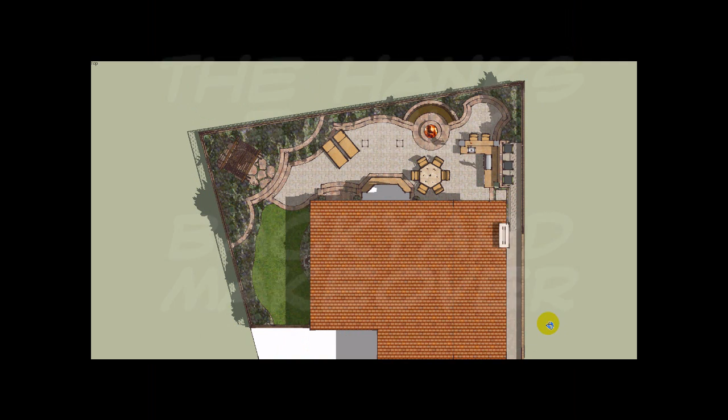In this version, we are standing over the house looking down. I have opted to design a barbecue with a fire pit as opposed to a fireplace. I felt the fireplace was possibly a little too bulky, and with it in that area, it made it tougher to get a barbecue kind of outdoor kitchen feel going without crowding the area. So I opted against that in this first design, but we could always explore that later.

In this version, you'll see we have the existing wood structure over here. We have some new planter walls that will take care of that raised area and also set some of these other lines in motion that I've opted to go with. We have a new buffet counter in this area, some new steps down from a future French door coming off the dining room, and a nice bar with a trash area behind it hidden by a raised wall. We have some seating walls all along the back here.

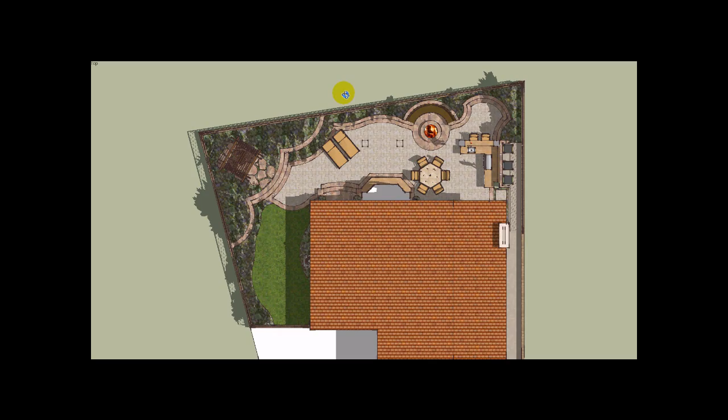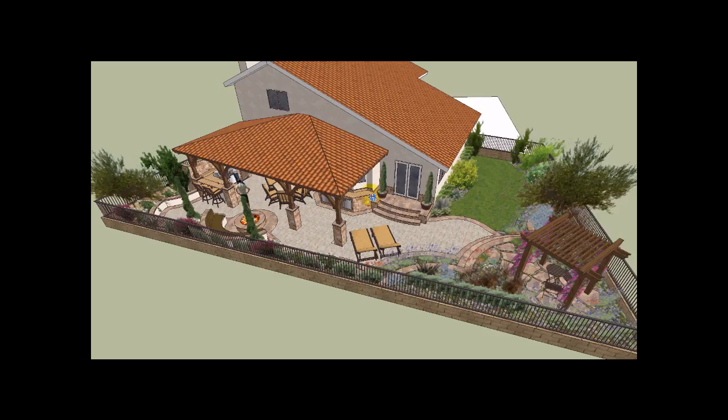As we get down into the model itself, I'll show you some of these elements in 3D. Again, this is a view from the back of the house. We have the existing wood arbor out here with some new scalloped walls and steps. We have the stoop coming off of the future dining area, and the buffet counter over in this area. My patio cover has a heavy beam patio look with nice knee braces that form these arches, with about a 42-inch to 48-inch tall masonry column base with exposed wood above that.

And as you can see in this view, we have a seating wall, some banquette seating here that flanks this fire pit. I'm actually showing on the house a stone wainscoting treatment that can tie this whole back in real nicely. So that's what you see there.

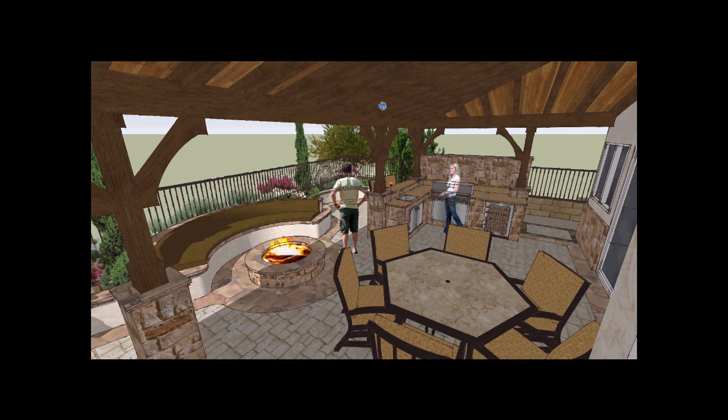Over here we have another view. Again, underneath the cover here, we've got this heavy beam look, but it's nice and vaulted toward the back, so it gives you some interior volume without making it feel enclosed. Again, nice built-in seating, fire pit right here that's close to your diners, so it can produce some warmth for you at the table, as well as warmth for those sitting around the fire pit. Plus, it's centrally visually located out these sliders and more visible from the kitchen.

I felt that putting anything in this back corner was just going to get hidden with the bar in place. And it was also closer to the neighbors, which you always have noise and privacy issues with. So I felt that was a good solution for the location of that feature.

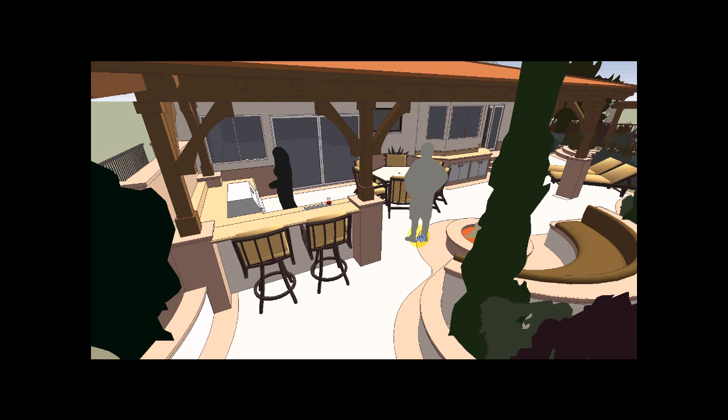In this design, I'm showing a tumbled paver floor with some stone banding. This bar barbecue has some nice overgrouted old world stacked stone and flagstone caps. I'm showing a limestone bar cap here and backsplash. Of course, those materials can be reselected as time goes on, but just some different views.

We have a nice raised bar back here where you can get a couple bar stools up to it, and you can enjoy some of the views back into the interior, as well as this TV back here on the wall.

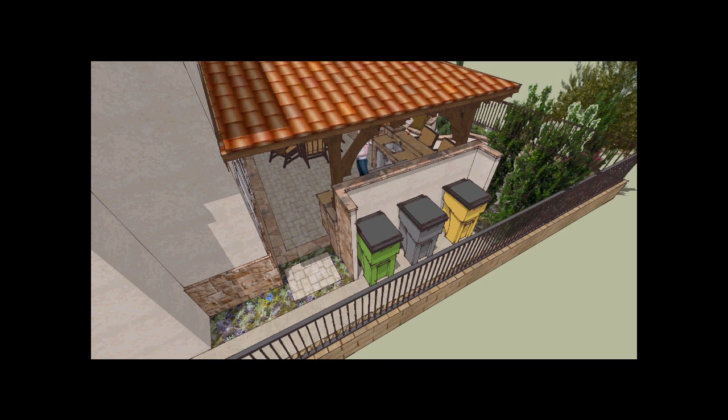And this is the trash enclosure area that's well out of view. Back behind here, this is about a 6.5 foot tall wall, and we have a stepper that gets us from here to the concrete area, and then we would have some plant material to soften things up.

Here's just another view of the bar area. This is kind of a nice overflow conversation area. This is all 18-inch tall planter wall, seating wall, if you will.

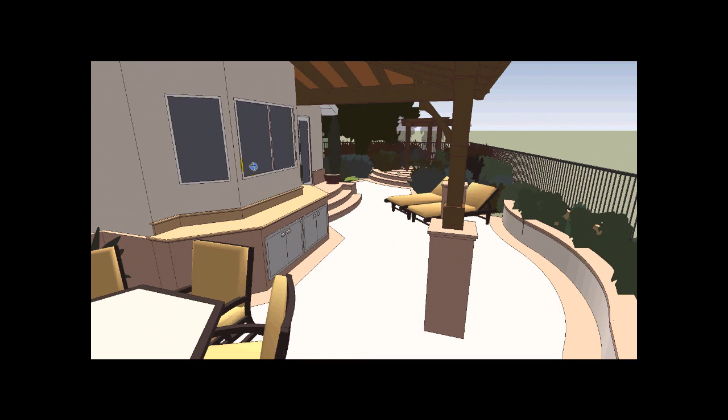Here's a view from underneath the patio cover looking down towards the gazebo. Again, this nice 18-inch seating wall does a couple things. It's useful as far as crowd and overflow; you can put a lot of people on that wall. As they're sitting down, they can eat and sit on that wall, as well as it takes a little visual heat off of this existing slump stone wall, and it acts as a nice border and boundary to plant in between. So there's a couple reasons for that.

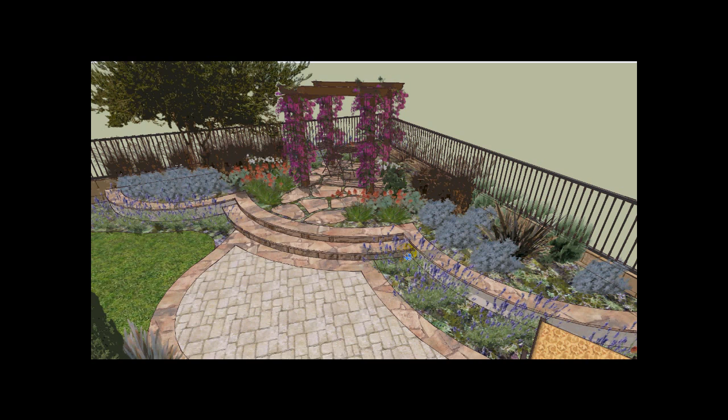And this is the raised area, so right now it kind of cuts straight across, so I'm showing some reverse scallops that act as a nice step edge to give that some structure there. The side yard would just be some grass. I'd come in a little bit, maybe do some fruit trees, hide the air conditioner a little, and work with it in that respect.

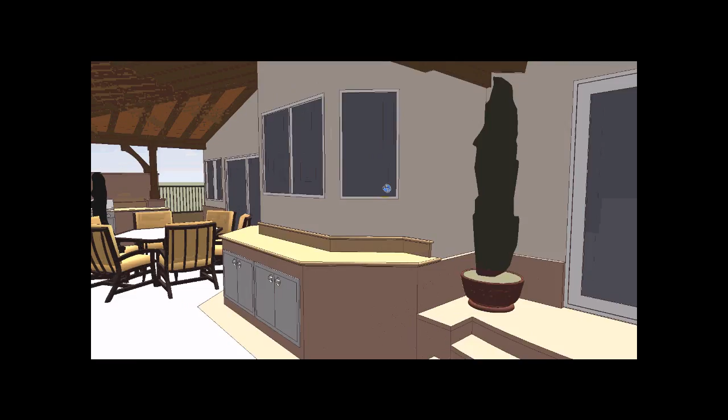This is a view from up on your arbor area, and this shows the roof where you guys will be coming out of. Let me zoom in here a little and show you what's going to have to happen in this roof.

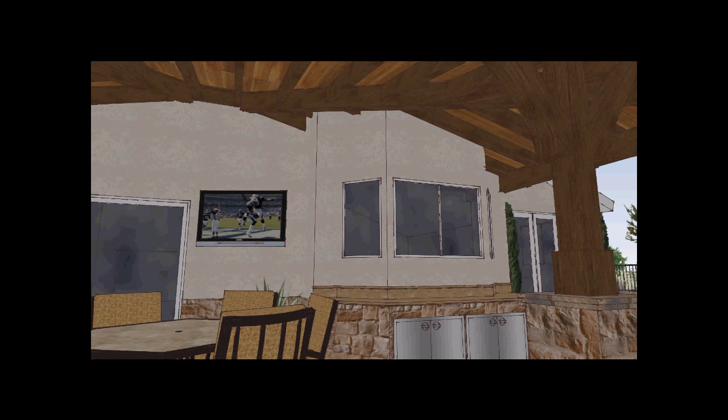To make this thing work, I determined it would be necessary to pop the existing roof off of the window so that we can get that beam to come all the way back. And then what we would do is raise that wall up to the ceiling, so it would intersect the ceiling as such. That will get rid of that existing roof line problem and how we are going to match up with that. So that is how I thought we could deal with that issue, which does become a bit of an issue when you have the two roofs coming together.

And we'll need to change the roof line from what you have to a slightly less steep pitch, because we have to come in underneath this window here. So this is a slightly less pitch than the current roof, at about 2.5 to 1, I'm assuming.